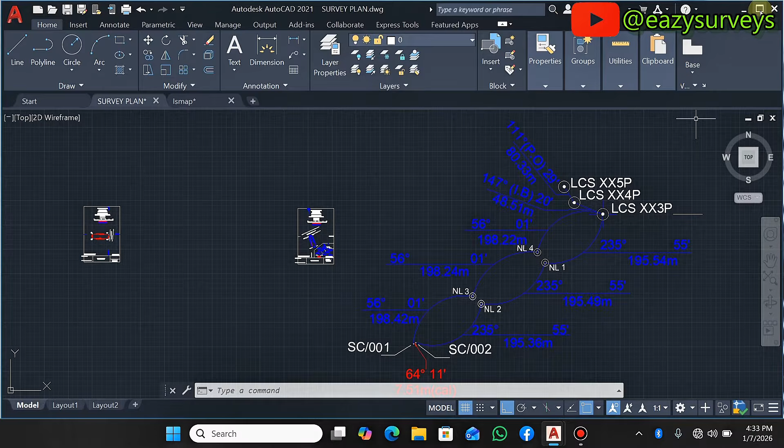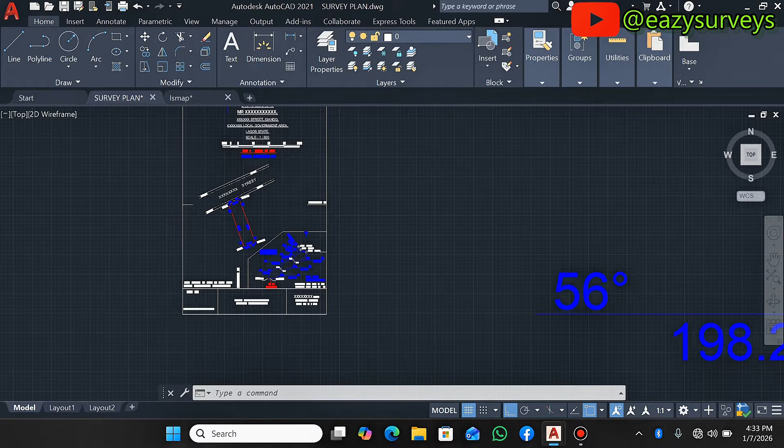This is not a full tutorial video, just a preview. It's one of the first jobs I did for a client this year, and it occurred to me that I could have a webinar or go live to train my supporters on the channel this year.

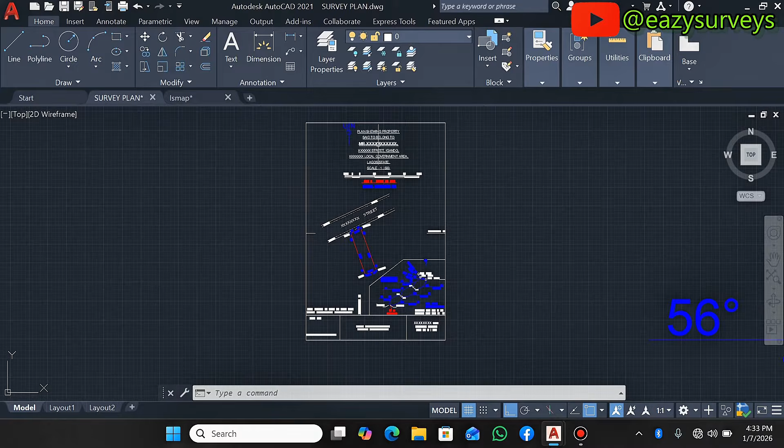So this is a record copy plan. I made it for the client, and it occurred to me that I can have a webinar on this or go live to equip and support my followers with knowledge in the land surveying profession.

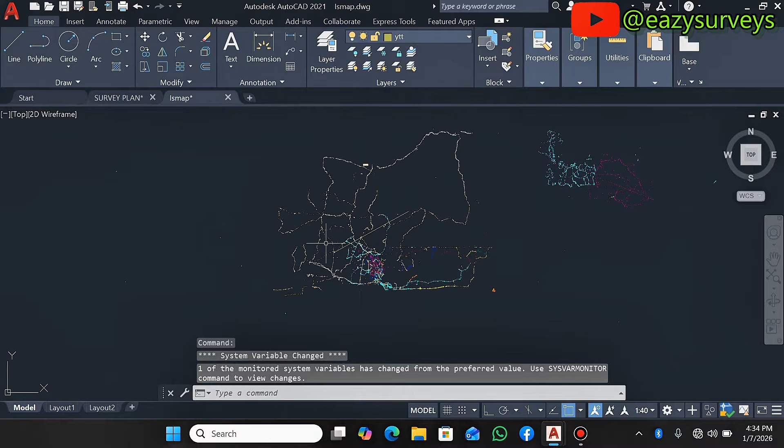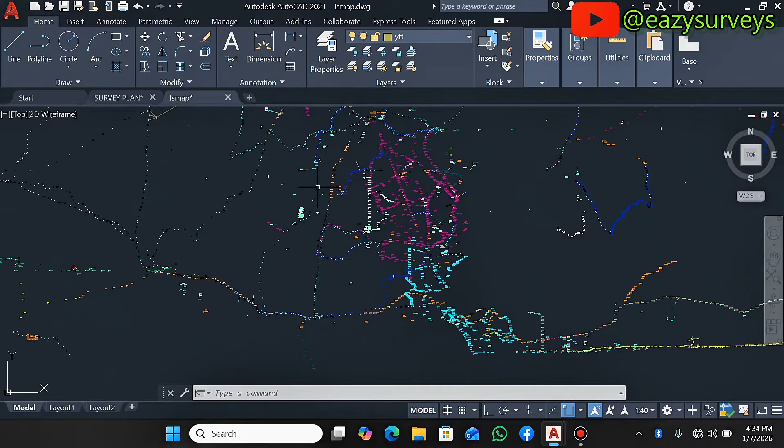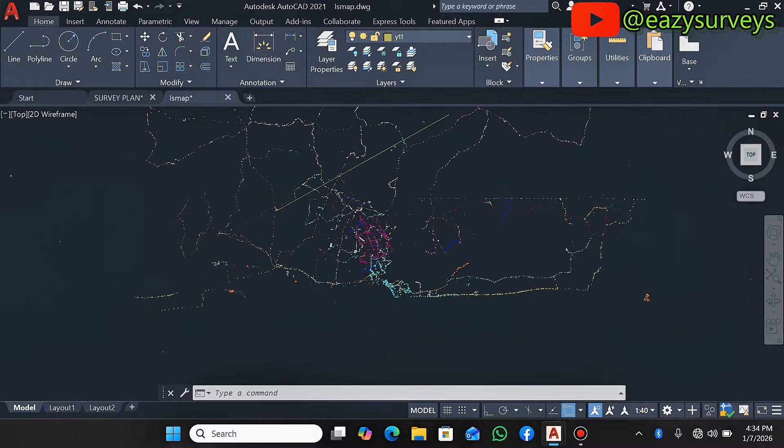The record copy plan comes with principles. It's not just a plan you produce anyhow as a surveyor, a professional. You must make use of this, for Lagos State though. This is the Lagos State vector map, and it contains all of the government controls all over the state. You can only have access to this from the Surveyor General's office or from a registered surveyor. This is the map you'll be using to produce a record copy plan for your client.

It's actually used for lodgement if you want to lodge your survey plan. This is what is required after the basic or normal general survey plan. It comes with a principle.

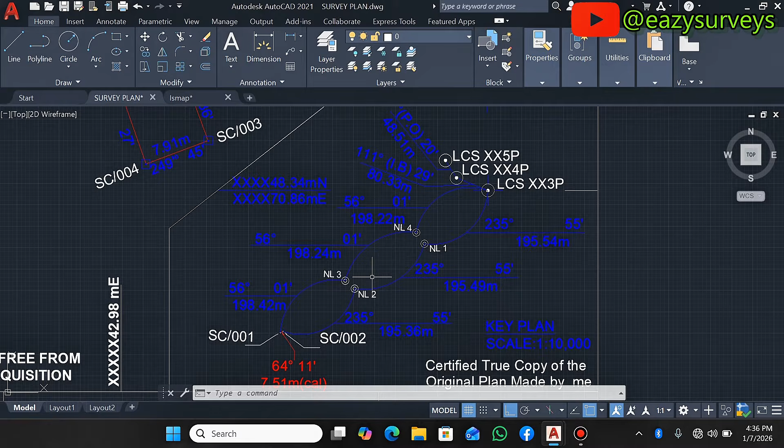You can see these are the controls, government controls. PO stands for point of origin, IB for initial bearing, and all that. In the webinar or live session, you'll get to know how we arrive at the principle backing it, and the distance you use to run your traverse must meet the cadastral specification, but you'll get that in detail.

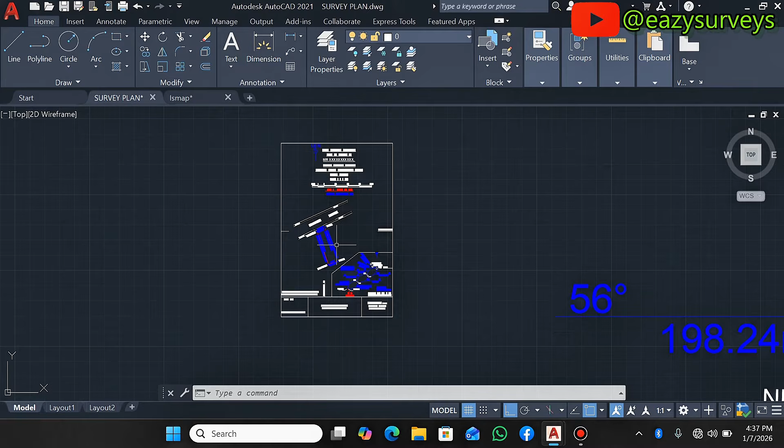I'm doing one for this soon. I just completed this one, and of course I'll be making a record copy for this particular one soonest.